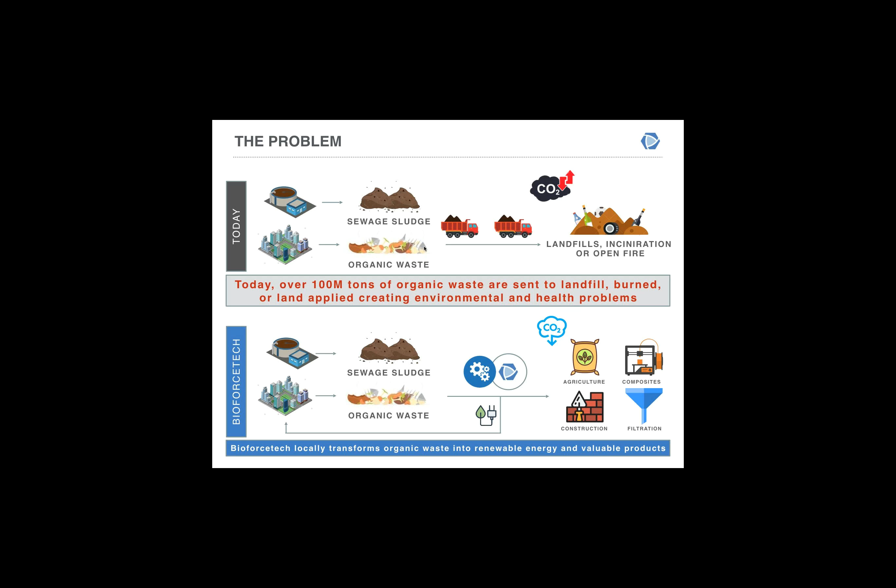The solution we developed is divided into two steps. The first step is called the Biodrying technology, and the machine is called the BFT Biodryer. It's a drying system needed for wet biomasses - biosolids, in our case, which is the focus of today's webinar. The goal of the first step is to remove water.

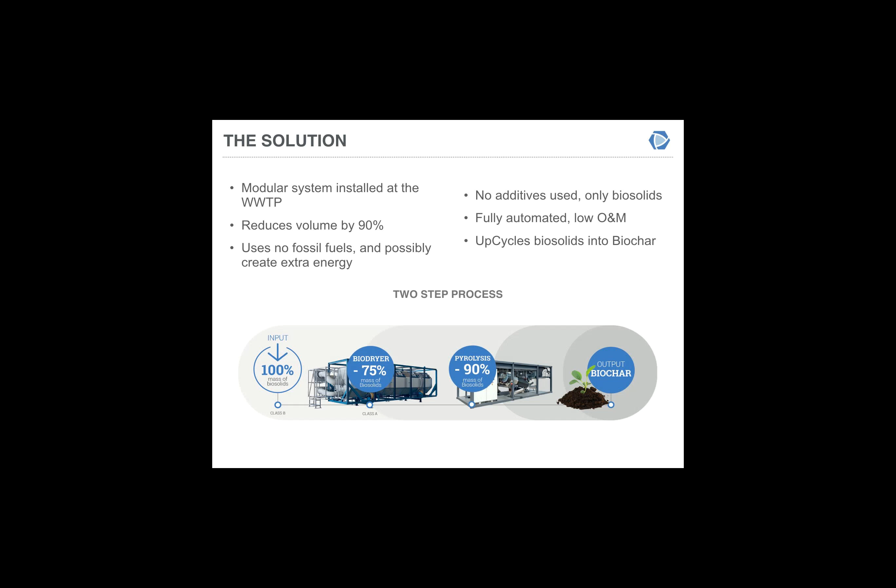And since my background and all of the other founders here is in automation, we focus a lot on that, to make sure to keep the operational and maintenance costs very low. The concept, again, is to upcycle organic waste - biosolids in this case - into a valuable resource, which is the biochar in the end.

Focusing on the first step, again, this is the BFT biodryer. I put some data here on the slide for all of you to see and look at. It's a modular approach, meaning we supply the biodryer in just one size. We don't do custom engineering or build bigger units. We've already maximized the dimensions and performance of the unit to be delivered and shipped anywhere in the world in a regular container, and each biodrying unit will achieve the data you see on the spreadsheet.

As you can see, we have a throughput of about 1,200 wet tons a year with biosolids at 25% total solids. It's a batch process, lasting between 48 to 68 hours depending on the initial moisture content of the feedstock. We can load up to 8 wet tons per batch. The system operates at an average of 150 degrees Fahrenheit, into the thermophilic phase, which is why we're able to produce Class A or exceptional quality biosolids under EPA 503. Time and temp is met, and pathogens and other requirements are usually met, though it depends on the initial biosolids concentration and other data.

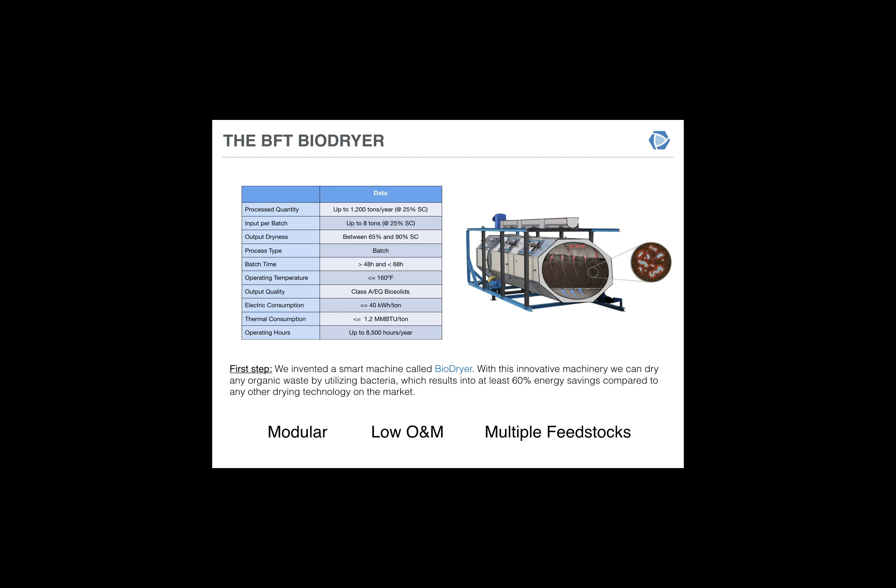This is a video that I think will help you understand a little bit better how the technology works. It's an animated video, and I hope you can all see it.

The first step of the process is called the growth phase. You can see the vessel inside is completely empty, with no moving parts inside. At the beginning, for the initial few hours, we inject air from the atmosphere with no additional energy being introduced—simply cold air. This activates the bacteria already inside the biomass, the biosolids in this case, and the bacteria raise the temperature of the biomass through their natural respiration until we hit about 150 degrees Fahrenheit, our targeted temperature.

Once we have a hot biomass, we augment the airflow within the vessel, pushing more air, still without any external energy source. That way, we're able to remove the first 50 to 60% of the water needed to achieve the right dryness afterward, until we reach about 55% moisture content. All of this is done just by biological activity, with the bacteria generating heat.

Once we reach that moisture content, the bacteria don't perform as well as before, like in composting—they need water content within the biomass to keep doing their metabolic activities. At that point, renewable energy produced from the pyrolysis step is introduced to the biodryers to finalize the drying cycle, with no natural gas consumption, just renewable energy finishing the cycle to achieve the targeted moisture content.

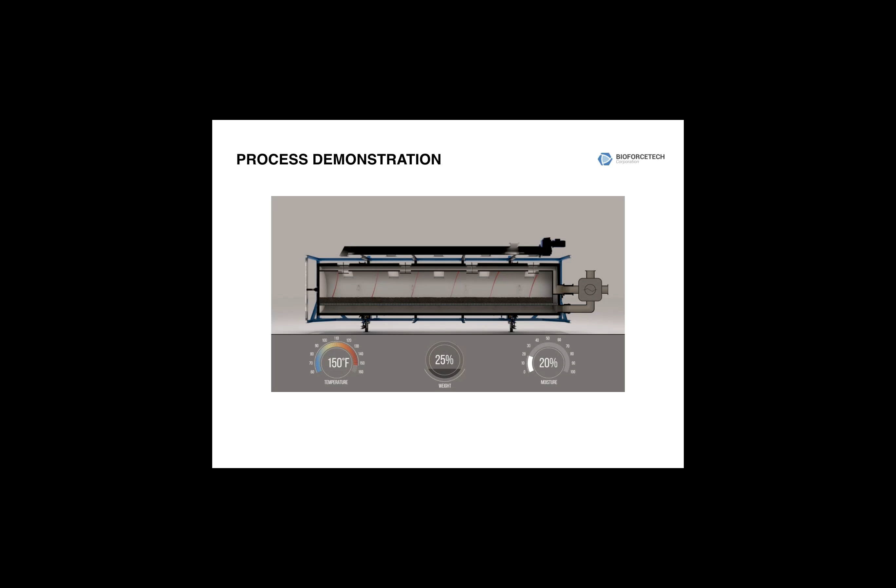We can adjust the output in terms of dryness between 65 and 90%. Ideally for pyrolysis, if biosolids are the feedstock, we target a solid content between 70 to 85%, so we don't need to go as dry as 90-95% when pyrolysis is involved—we can stop a little earlier. Once the batch is done, we unload the vessel, then feed the pyrolysis system in a continuous way, and the biodryer is loaded again with new wet biosolids to start the new batch.

Focusing on the second part of the process, the second step, it's a pyrolysis technology called the P series. For this step we offer two sizes: a smaller unit called the P5, and a larger unit called the P15 that has 3 times the throughput of the P5. So we have a bit of economy of scale for larger projects with the pyrolysis step.

We partner with a German company called PYREG. They developed this pyrolysis technology over 10 years ago, and we partnered with them a few years back. Right now we are the exclusive distributors in the United States and other territories. We do engineering together with them to make the machine and units compliant for the US market, making adjustments for automation and to ensure compliance with US laws and regulations.

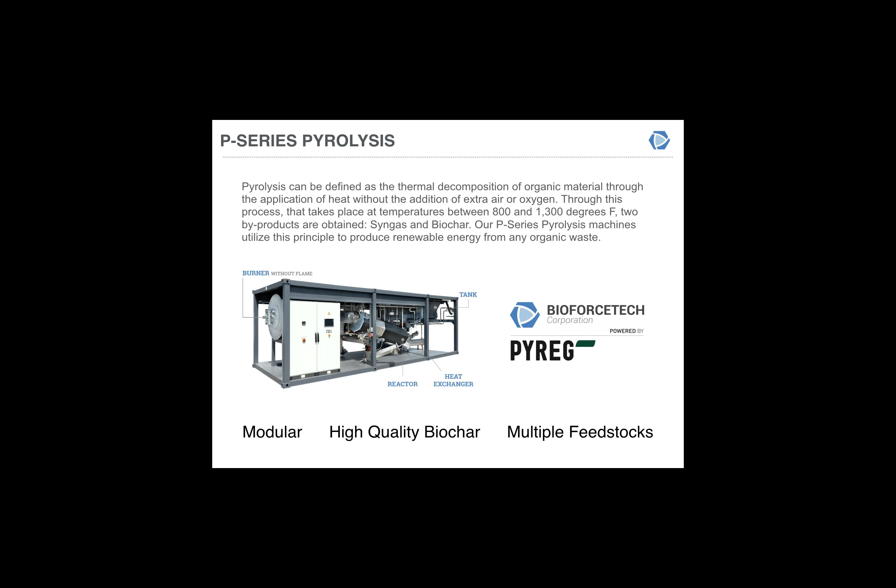The managing of the syngas is done differently, and I'm showing you right here. Every unit has a receiving tank on top to accommodate about 2 tons of dry material. We have a special valve that allows the biosolids or biomass to be introduced into the main reactor, where no oxygen and a temperature between 800 and 1300 degrees Fahrenheit is found. The biomass will, in about 20 minutes, reach the end point, having turned into biochar.

As soon as the syngas is created from the volatile matter, we push it into a special combustion chamber called the FLOX burner, where we do the oxidation of the syngas. It's a flameless combustion chamber with a constant temperature all the time and no visual flame, so we're able to keep NOx and all combustion pollutants at a very low level. At the same time, we're able to avoid the production of any other byproducts - oil, vinegar, or tars - because for us those have no value, only problems.

At the same time, we generate a high BTU content, high heating value exhaust gas, which is reused within the main pyrolysis reactor to keep the whole system hot and self-sustained. Once the pyrolysis system is fed with biomass dried to the right point, the whole system becomes energy self-sufficient from a thermal standpoint. We're also able to capture the waste heat that isn't used, since we produce more than needed, and exchange that for the production of hot water - hot water being the form of energy we produce from the pyrolysis system.

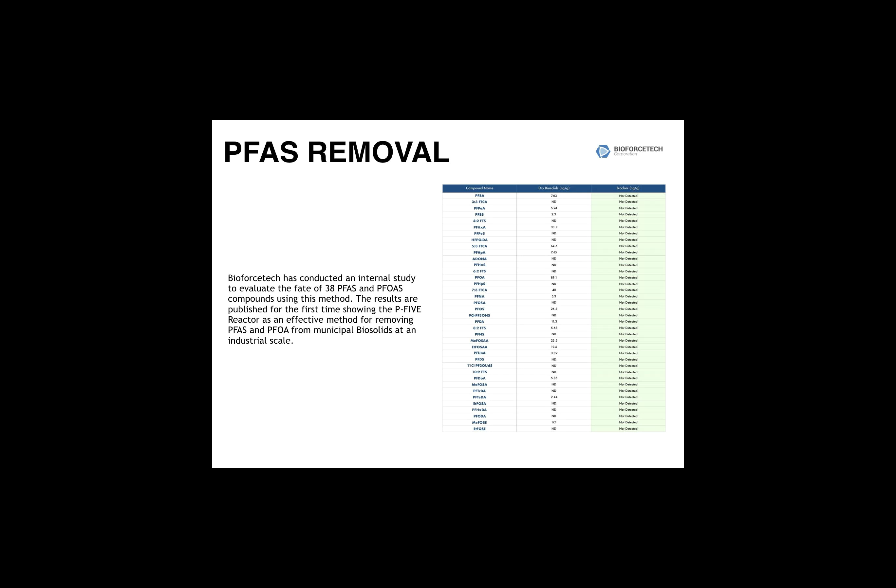Biochar. This is all about the technology. The biochar is the core of our system, the product that we value the most, because it's an amazing product that has a lot of value, not in terms of just money, but for the environment first.

We've been producing biochar for a long time, from the first prototype that we deployed to the full-scale systems that we have all over. Right now, the best use of biochar due to market conditions is as a soil amendment, especially if it comes from biosolids, mainly for the nutrients that we're able to preserve within the end product.

At the same time, we're doing a lot of testing with private corporations, with universities, and so on, to explore other ways of using the biochar. Some of the most amazing results we've gotten so far are within building material applications, and offsetting additional CO2 by replacing carbon black.

Those are the fields we are working on right now, and we think within the next couple of years we will have very promising results for additional applications and uses of the biochar.

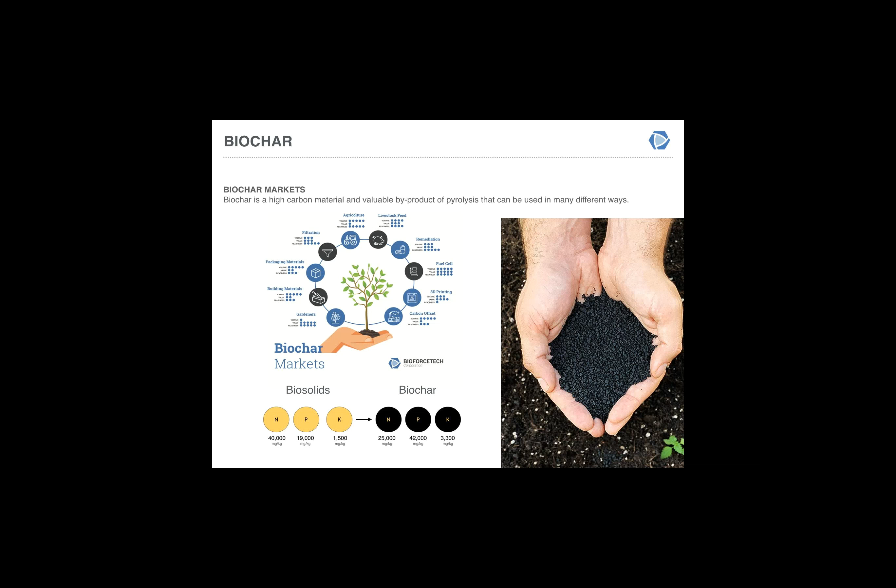Great example here that is happening in the Bay Area. Of course, we are located in Redwood City. It's a joint authority. They receive influent from 4 different cities. What is happening is that the BioForceTech system is processing the biosolids, and the city of Redwood City is reusing the biochar product. Instead of using fertilizer, they are using our product for their green areas and parks.

This is the best example of circular economy, and that is our goal, to keep everything and all of the resources in-house, possibly because, of course, we avoid truck transportation. It's like producing a resource instead of having to deal with the waste.

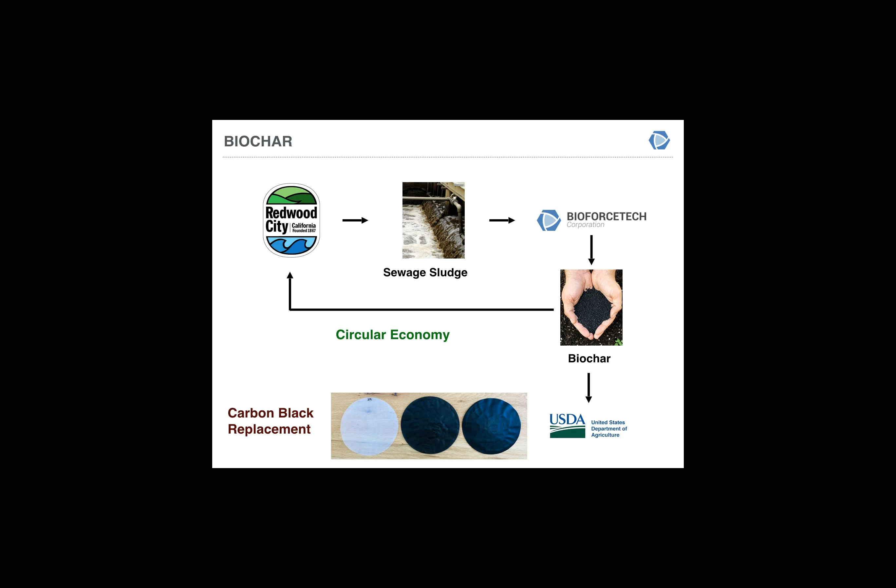In terms of the carbon black replacement, we have done testing with USDA for bioplastics, and that is, again, one of our goals for the near future, to come out with products for that replacement.

Just to highlight again some of the advantages of our system. Once a client installs our system, for the next 30 years, which is the lifespan of our equipment, the cost of managing biosolids or any other organic waste will be fixed and reduced.

So there's no more tipping fees. Everything will be processed in-house. We're not impacted by the energy increase, labor increase. Everything will be fixed and reduced for the next 30 years.

90% volume reduction, which is huge. Truck transportation nowadays is producing a lot of greenhouse gas emissions and, of course, traffic and problems for the city.

Energy positive system, so there's, of course, energy neutrality. Normally we find that with biosolids at 20% total solid in the beginning. It's a very big achievement to be independent from natural gas consumption, because if you look at regular drying systems, they all consume a crazy amount of energy just to dry the biosolids.

So with our system, we can achieve energy neutrality, or get to an energy positive system, if we have enough dryness at the beginning with the wet biosolids.

Again, the most important concept is to upcycle waste. So waste is not a waste anymore, but gets transformed into a resource for us, for the environment, and for all of the others that will come after us. We need to really take care of our planet right now.

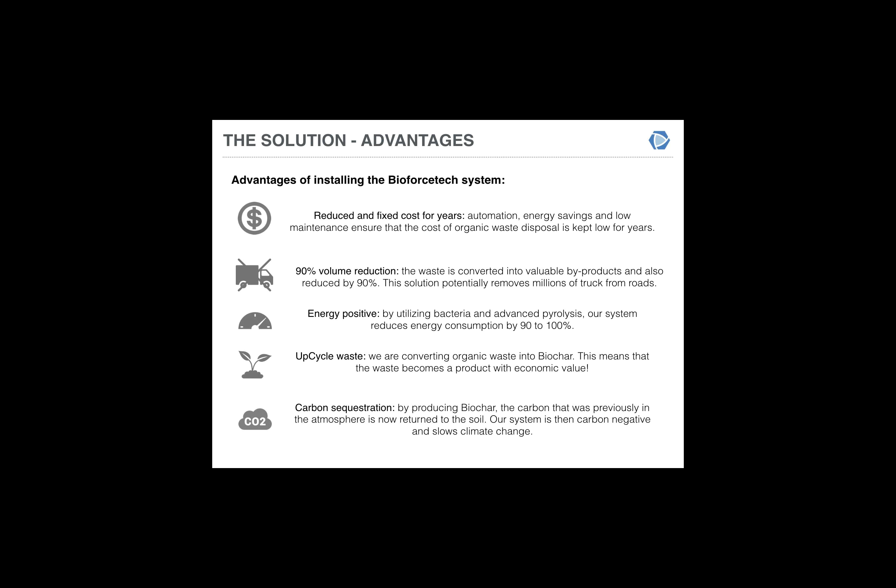First system in the United States, Silicon Valley Clean Water. I would like, of course, to thank them. They've been the best partner during our journey. Very innovative people. We wouldn't be here without them. So very, very glad to have found such a partner in our early days.

Couple of examples. After the first installation in the United States, we are now deploying other systems here in the U.S. and overseas. And we found a great way of delivering projects is design and build.

This is just an example, but the message is that we're not just focusing on biosolids, although that is our main focus. We start to see more and more interest from wastewater treatment plants or cities to process other waste streams, organic waste. So we are focusing on a few projects that will have the inclusion of food waste and yard waste. We envision a project being a mix of the sewer sludge and food waste within the same facility to produce high quality and high density biochar, and a separate facility to process just the yard waste.

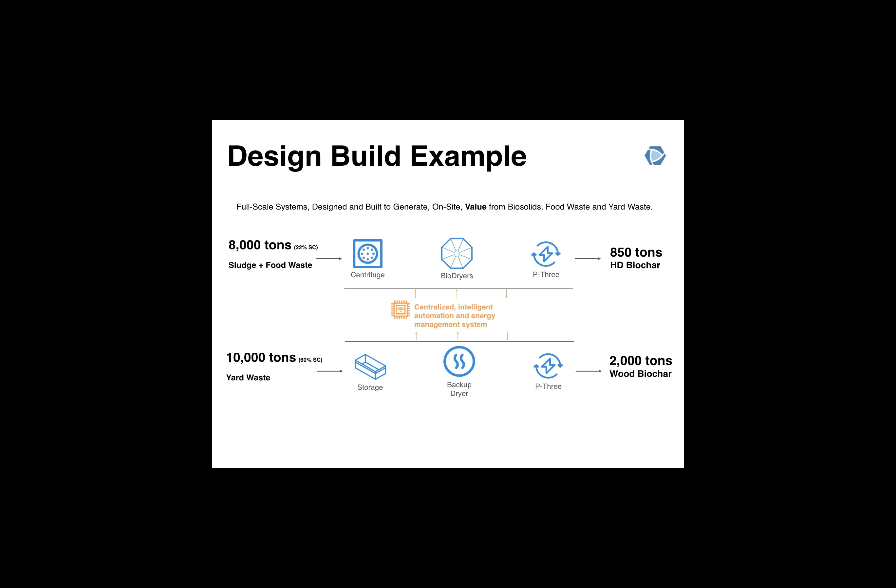Normally, yard waste doesn't really need a drying step before, but it's always good to have a backup dryer just to guarantee a constant product.

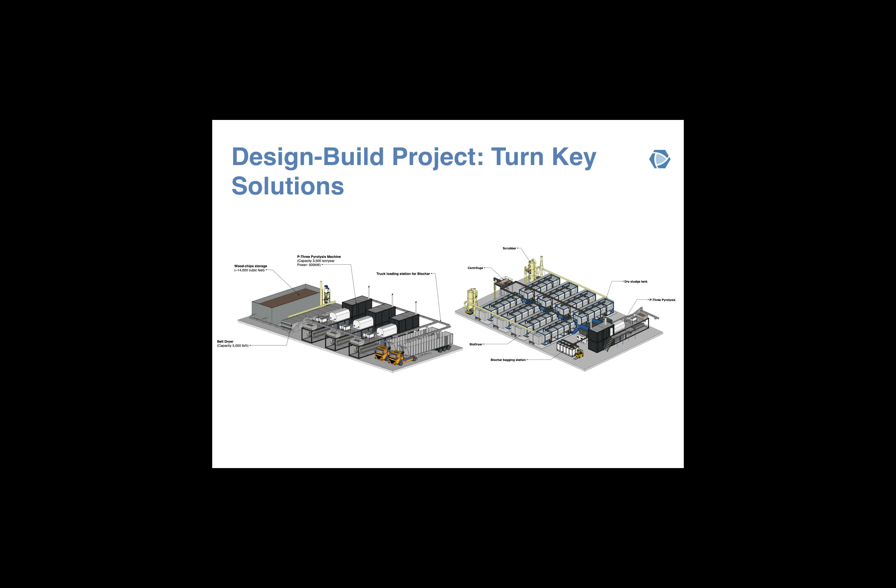So these are some of the projects that we're working on right now. The one on the left will be for the yard waste. There's three P3 pyrolysis systems, and the one on the right will be the combination of the food waste and the biosolids. I would like to say that this specific line doesn't have digestion, so it's an innovative approach to food waste and biosolids with no co-digestion. Very innovative too.

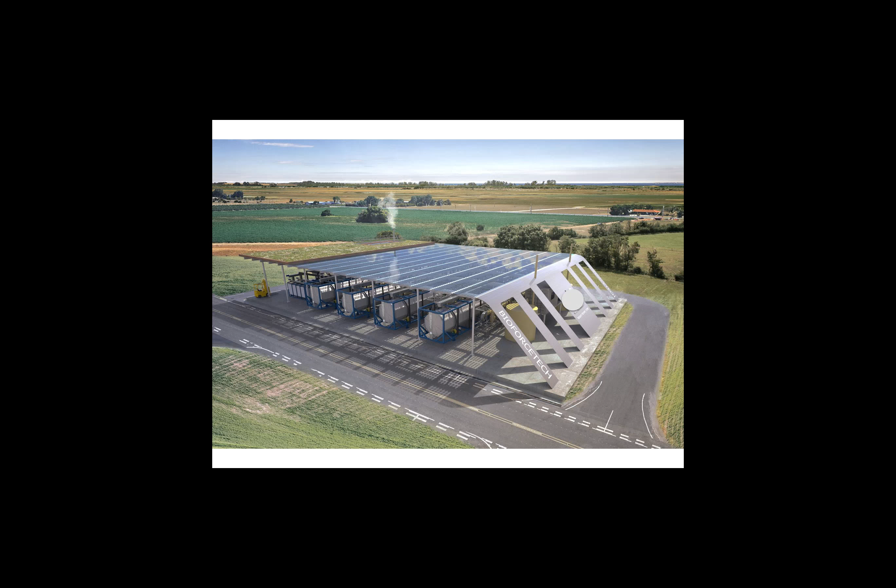And this is how everything will look like from an installation standpoint. So we respect nature, we make good products, and of course they look nice too, at least in my opinion. So this is what we do.

And that was the end of my presentation.

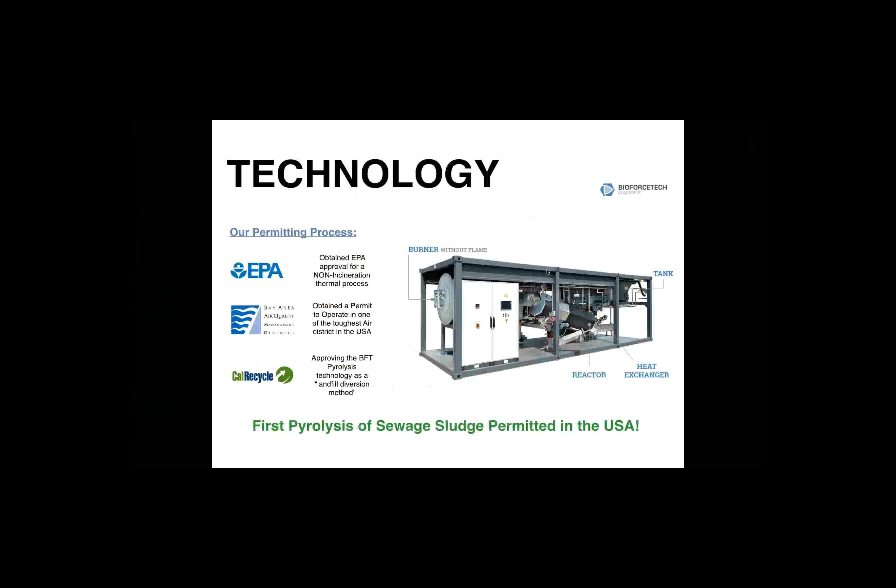Okay, thank you. And then another good question was, how is the sludge feed removed from the biodryer when it's done? I don't think you really showed that. That was an excellent question. Let me actually reuse this. Do I still have control of this screen, Janine? Yes, you do. Okay, let me go back to the biodrying system.

Wow, all right, yes, no, thank you for showing that. So another question was whether any of the components of municipal sludge or waste could foul that flameless burner. They were thinking specifically of siloxanes or something like that.

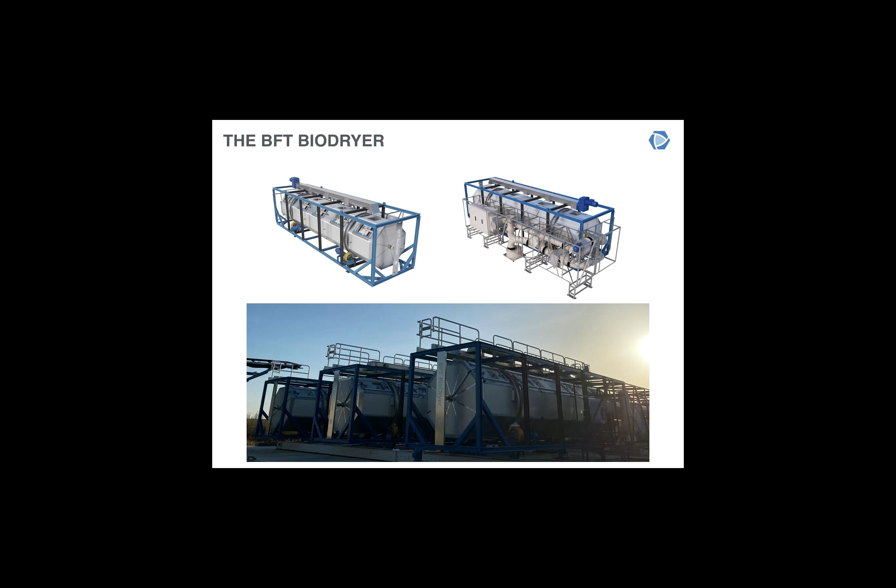We use about one-third of the energy that is produced here by the combustion of the syngas. The remaining two-thirds are exchanged and transformed into hot water at 200 degrees Fahrenheit. The hot water is then fed back to the biodryers. This is a second heat exchanger that receives the hot water from the pyrolysis step and transforms that into hot air. So that is how we capture the hot water and finalize the drying part.

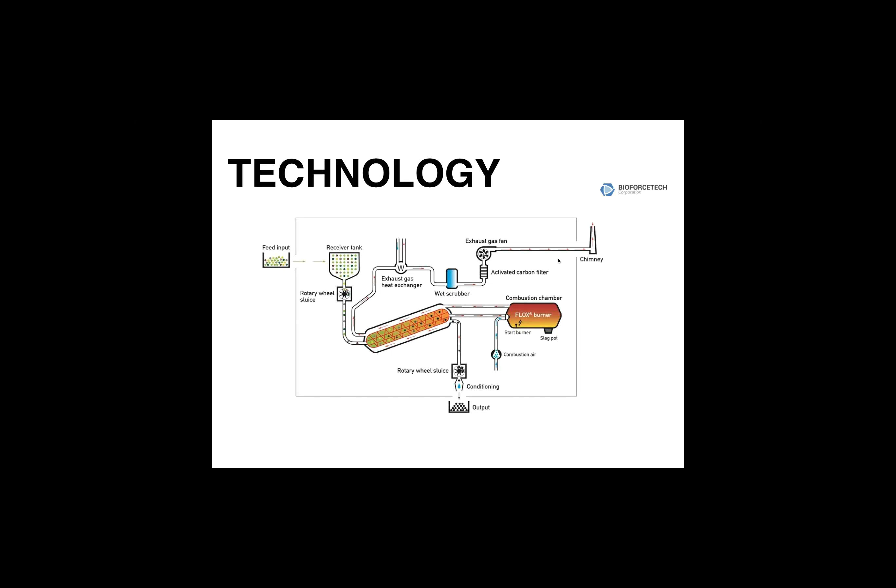All right, excellent. I have a series of questions here, Valentino, about what kind of contaminants are in the gas and the recycled water. Similar types of questions: are you testing the gas or any of the return streams for PFAS? And again, what about air emissions? Have you tested anything that's going into the air for PFAS?

Yes. So the syngas composition is nothing that we have detection on. We've done testing in the past, but the way we manage the syngas is that we completely combust and oxidate it. What we monitor, and what we had to monitor, were the stack emissions - whatever is left after combustion of the syngas, after the exchange for hot water production, after the wet scrubber, and after the AC filter. We've done intensive source testing here because of the requirements from the San Francisco Bay Area Air District, and we were able to get a permit that was very stringent. There was no real category for pyrolysis, so we've been given very, very low emission allowances. Everything we are emitting is pretty much CO2 and water.

There's some other compounds - we have not analyzed the stack for PFAS and PFOA yet. That was something we did internally in September 2019 for the solids part. Further testing will be done here by our company. We're still evaluating how and when, but right now what we can show is about the solids, PFAS and PFOA destruction. We have not analyzed the condensate water from the wet scrubber, nor the stack emissions for PFAS and PFOA yet. The theory behind it is pretty simple, at least for the solids destruction point.